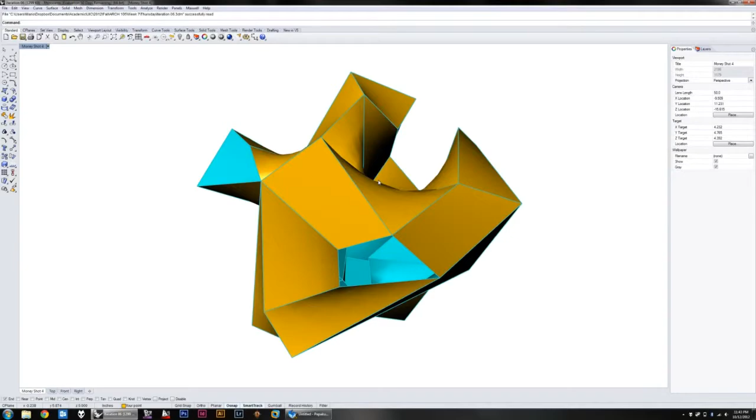Okay, so go ahead and open your model that you're going to be using. If I can find mine—yeah, whatever. Okay, so open it up. Notice that it's nice and pretty and done, and it's got whatever changes you need to make.

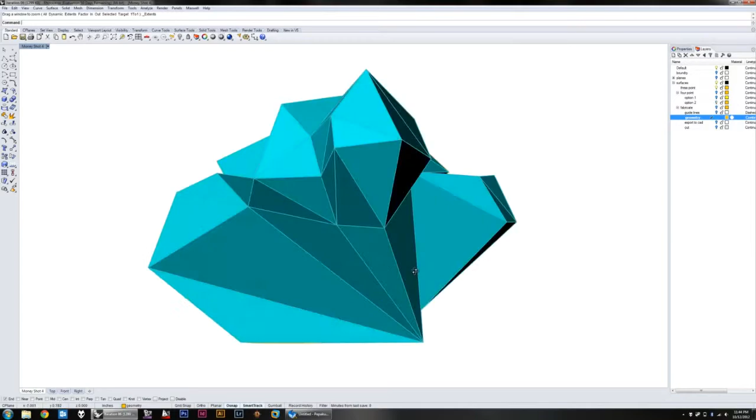Obviously this is the four-sided surface one. Go ahead—yeah, this is the 4-point. Go ahead and pick out your triangulated model. Mine is right here. I'm going to flip mine just so the faces are where they need to be.

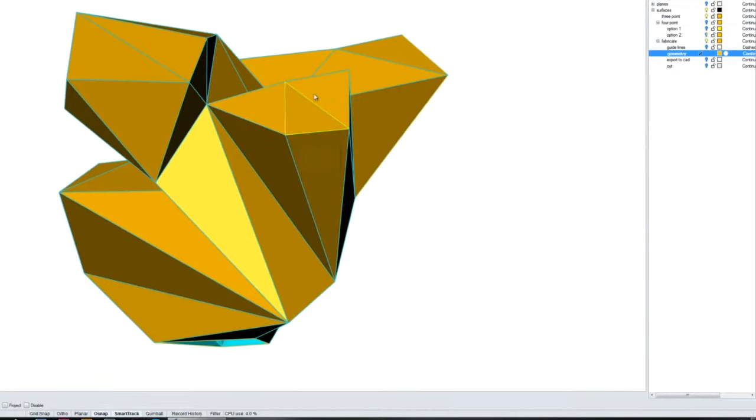So this is what I want to produce, essentially. You've got to make sure that if the surfaces are not joined, make sure that they are joined. You can't have something like this, right? All these things need to be together as a whole polysurface.

So just select everything, type in J or 'join' and enter—join, enter, right? Select the polysurfaces. If I don't screw it up. Alright, so these are all joined now.

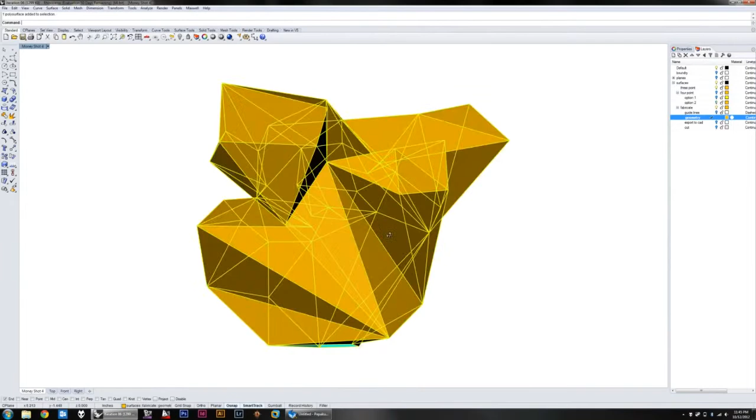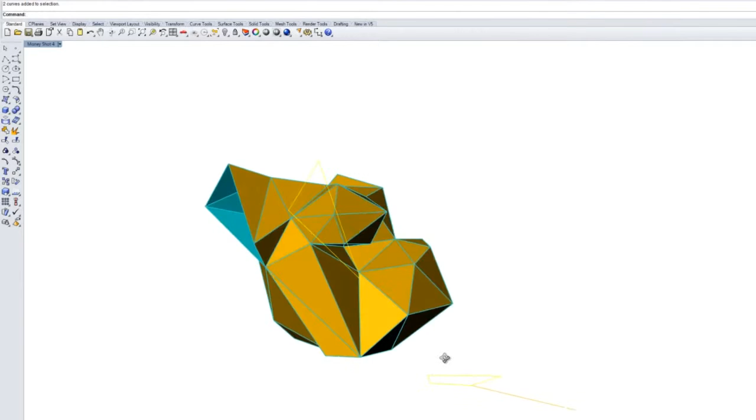A good way to test this is to just move this geometry ever so slightly, and you'll see that I have weird lines here. So I'm going to go ahead and delete any sort of extant data that will not be required to produce your study model. So that's good, that's good, that's all deleted.

This is nice and clean, so I'm going to hit File, Export Selected. I'm going to choose wherever—this one's just my desktop, right? Tutorial, sounds good. And then make sure to, under Save As type, just choose 3ds.

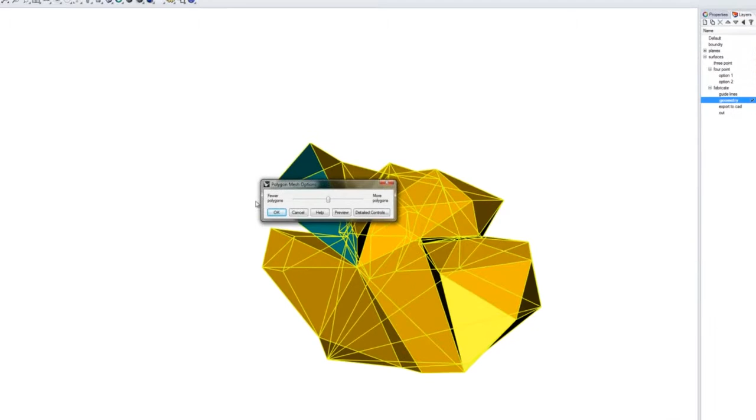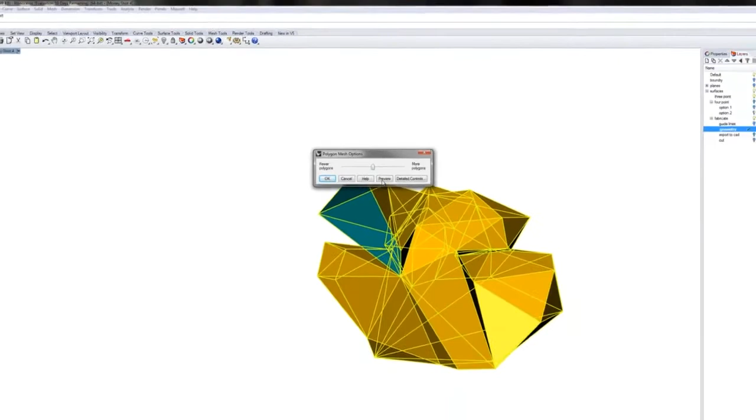Hit Save, and this option should pop up. Basically what it's doing is meshing this data, which means it's simplifying it and creating triangles from it—exactly what we did with our 4-point surfaces, except the program is doing it automatically for this geometry. That sounds nice and convenient, but it's not, because as you'll see, this is a preview of how it's going to mesh, and you get all these weird lines and geometries and planar surfaces.

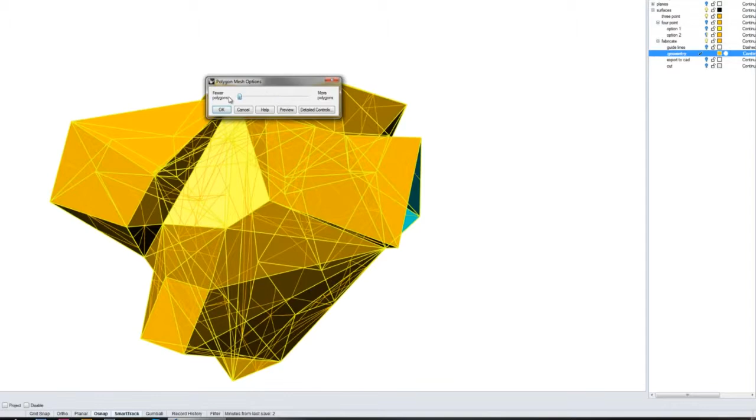We don't want any of that, because it's real nasty when it unfolds, and this Pepakura program creates tabs for it—it's just nasty. So what you want to do is slide the slider all the way down to fewer polygons. Hit preview one more time, and now you'll notice that geometry is a lot cleaner, or at least a lot more simple. Once that's done, hit OK.

Then you can close this. You no longer need it. I'm going to save it. So this is the 3ds file that we have, right, or that we exported out.

So in Pepakura, go ahead and hit this Open File button. Go to wherever it is that you saved it. I saved it on my desktop. Click this tutorial, or click whatever file. Hit Open. Click OK. You'll notice that this is black face right here.

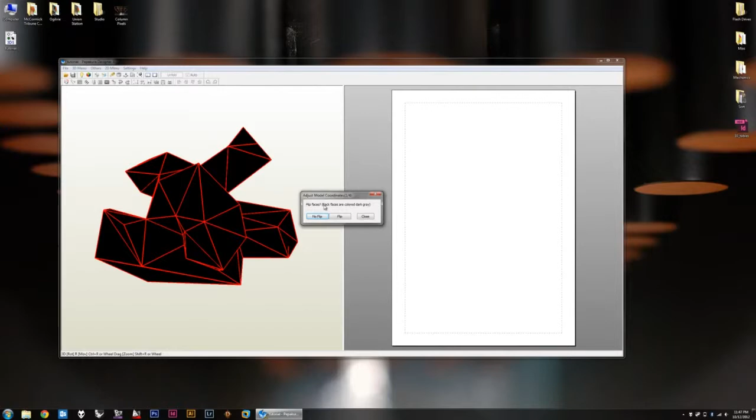Basically, it's telling you that the back faces are colored dark gray, right? So this should be okay because it's in what's called textured view. I'll go over that in a little bit. So hit no flip, then hit finish, right? Then hit OK. So this is your 3D model, okay?

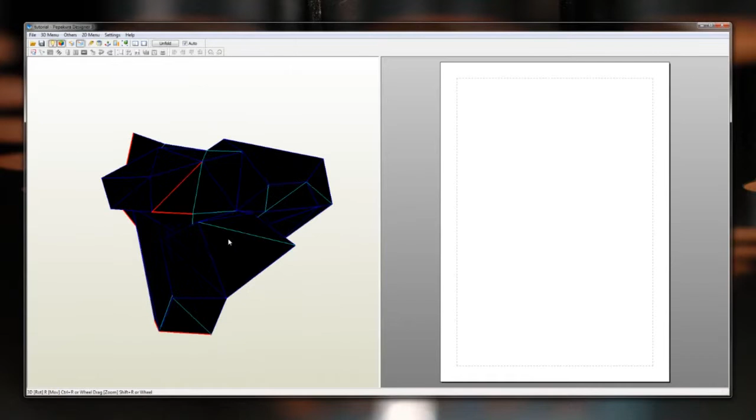So to eliminate this, all you have to do is unclick this button, and you'll see that the darker faces are the inside, lighter faces are the outside, right? These red edges are the naked edges, and this blue is essentially where it's going to unroll to create. So we just got to make sure that all the geometry is fine. Yes, this looks like my model.

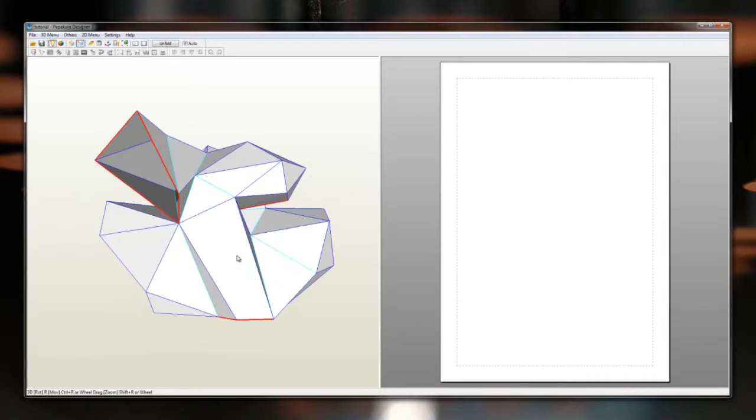All right, so go up here and hit the unfold button, and you'll see that it automatically unfolded this thing on a 2D surface, right? So it automatically created these tabs, and it automatically created fold or score lines.

Now these fold or score lines, there's two different variants. One being the dash dot, the other one being just straight up dash. Dash dot is the ones folding in, so creating valleys, and the dashes are the ones folding out, so they create mountains.

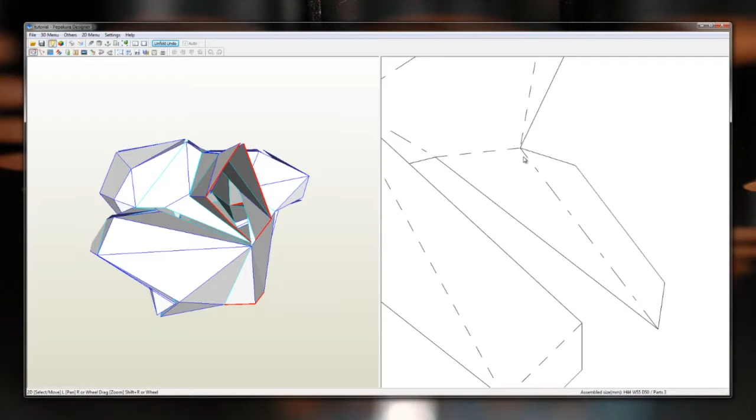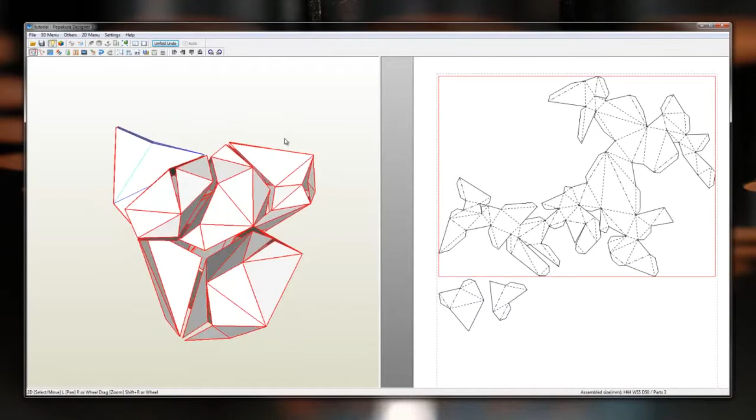So this is kind of, it's a little weird, it's a little crazy. If you click on each object, it actually highlights the geometry that it's creating, right? So this little guy creates this over here. This little guy creates this. This big Gigantor guy creates this big Gigantor geometry right here, right?

So the first thing that you're going to want to do is figure out, like, which surfaces or edges go to which tabs. So what you want to do is go into the 2D menu and hit the Show Edge ID button, and you'll see that it actually adds these IDs, or identification marks.

So this 8 tab, which is right here, goes to this 8 side, right? Let me find another example. So 2 goes to 2, 4 goes to 4, right? All this stuff. Nice and pretty.

It's not 100% clean sometimes when it creates these tabs, but keep in mind that this geometry, they are tabs, so they'll work. Like when you cut this out on your mat, you're basically going to be cutting here, here, then here, and here, right? This will create the geometry. This will create the tab.

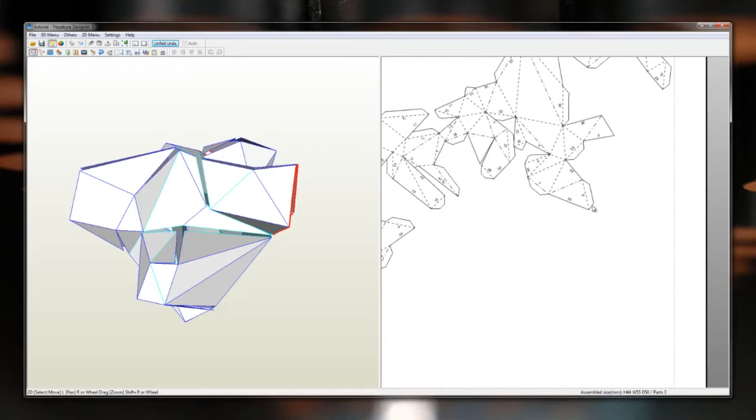You're never going to see this, so it's fine that this little bit of portion is just completely cut off, because you're going to put glue on here, and it's going to glue to side 27, which is off somewhere, I don't know, anywhere around here. So just keep that in mind when you're cutting these out using your X-Acto, that it's going to look weird, but it'll unroll just fine.

And in fact, I've already done 3 of these using this method, and it unrolls. It essentially starts unrolling itself, and it starts making itself while you're unrolling it. So it's just a whole lot easier to go through this stuff, right?

So another thing that you want to keep in mind is you've got to know the basic height of your model in millimeters, right? So I forgot the conversion, let me see. Right, so for every 1 inch, it's 25.4 millimeters, right? So if this is like 4 inches tall, it's roughly 100 millimeters, right?

Because in order to get scale correctly, let's say this is 4 inches, like from here to here, that's 4 inches, and that's what I want to get out of my model. And we'll do scale next. So go to 2D menu and hit change scale.

Then scale factor, and it's going to ask you for the height. That's all we're concerned with, just the height. So I know that my model is 4 inches tall, so that's going to translate to roughly 100 millimeters. So hit OK, and you'll see that it automatically scaled this by the factor that I've set it to.

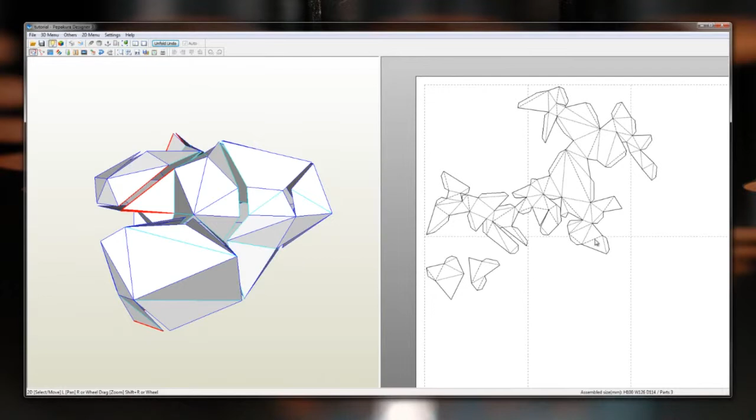You'll also notice that it expanded the amount of sheets of paper that are available. I think this is 8.5 by 11, so we're going to have to change the paper size, obviously. So next up is changing that paper size.

So we go to File, Print and Paper Settings. Actually, that was an A4. This entire program is in metric, so A4, A3, A2, and A1 are actually metric measurements for paper sizes, like European measurements. So this looks like it's going to be roughly an A2.

So just set the paper size to A2. Make sure that 'print lines clearly, vector print' is checked off, as opposed to print lines smoothly—you want them clearly. And then line weights, I set them at around 8. I think that's a good overall size, because that's the line weight of what's showing right here, so they'll read a whole lot better when you print them all out.

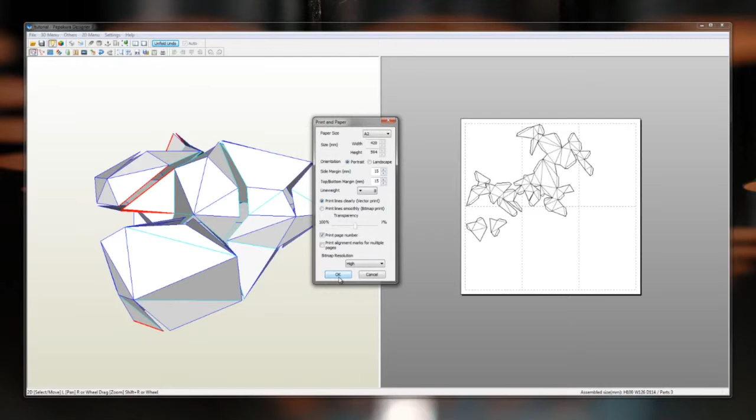So then hit OK, and you'll see that was a pretty good guesstimation of how large this thing is going to be. Now you'll also notice that there are margins. It's good to stay within the boundaries of these margins, so my unfold obviously does not.

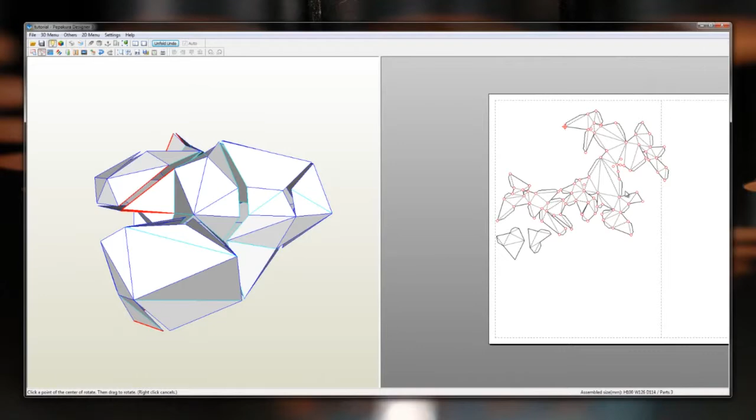So a way to rotate is, all you need to do is right click, hit rotate, and then just click on it and start moving. I'm going to move this way. So then again, it's clicking on one of the vertices and then clicking somewhere else and then start rotating it, and then positioning these guys such that they lie within the paper size itself. So that's fairly convenient for me.

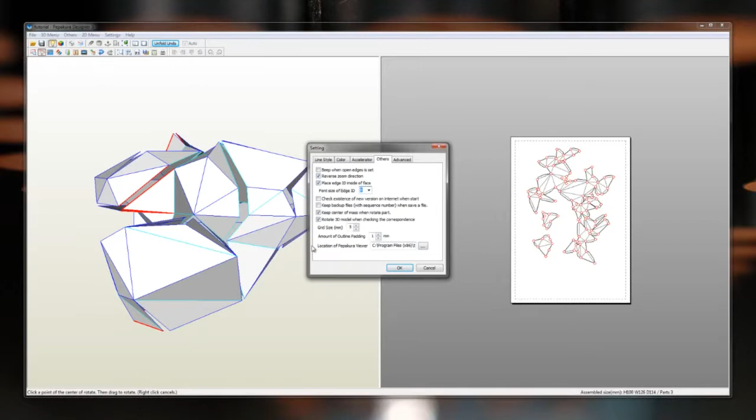Oh, here's another thing: zooming in and out is inverted, so let's go ahead and change that. Go to Settings, Other Settings, Others, and then reverse zoom direction. And while we're here, go ahead and place Edge ID inside of Face, and then choose the font size and set that to 8. That should be it. Yes, and then hit OK.

So what we just did, the font size changes the font of the tab sizes—the tab font sizes right here. So this just got bigger is all, which will help us when we're reading these cutouts and trying to put it all together.

Okay, so that is all done. We can right click, hit select and move. Now, say this is going to be a big guy to cut out and work with. It's going to be really frustrating—or not frustrating, but slightly more difficult to work with it. So I want to split this guy up into 3 pieces, because it seems like it inherently wants to be 3 pieces.

So an easy way to do that is you simply right click, join and disjoin face. Now you'll start seeing, if you highlight over an edge, it basically tells you where that edge meets up with—this is a really good tool when you're starting to put it back together. So 2 meets with 2, 38 meets with 38, 15 with 15. You guys know numbers.

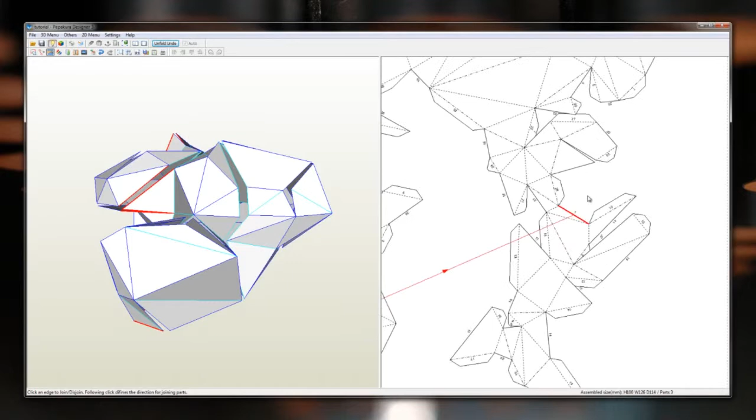Okay, so I'm going to say I want to split it here. So it splits that, creates a tab for it. And I'm going to split it here—it splits that and creates a tab for it. Done, that's it, that's where I want to split it.

You can split it further, or in a more meaningful way to what you're doing. Like, I could go further and do that, right? So it's just how you're going to want to fabricate this. It's easier to work with medium-sized chunks than it is to work with larger-sized chunks, but I wouldn't go so far as to create these tiny, tiny chunks for me to put together.

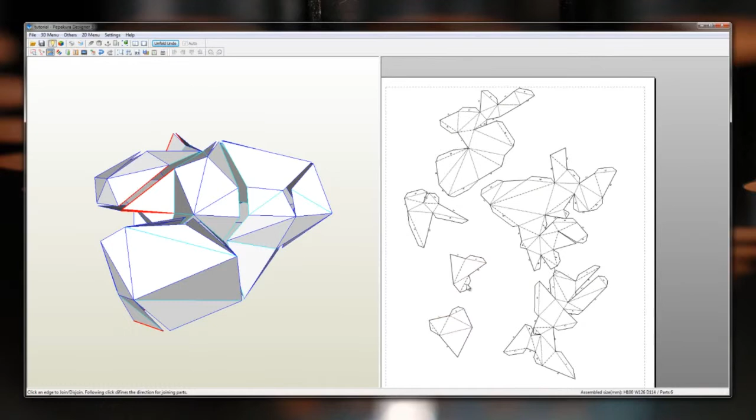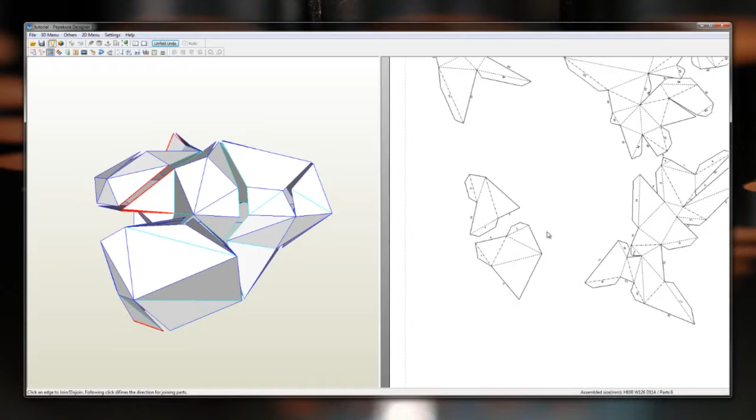And in fact, I think this is kind of too small for me to work with, so I'm going to click on here, and it's going to try to find a way to match these up in a meaningful way. But it does weird stuff like this, so I'm just going to disjoin it and leave it there, because there's no easy way to put that there. So the software did its best to put that in a meaningful way, so I'm just going to leave it.

I'm just going to look around my model, see everything's fine. This is kind of odd, but screw it. Oh, no, that's fine, I guess. You know what, in fact, let me, nah, I'll just leave it. All right, whatever, it is what it is.

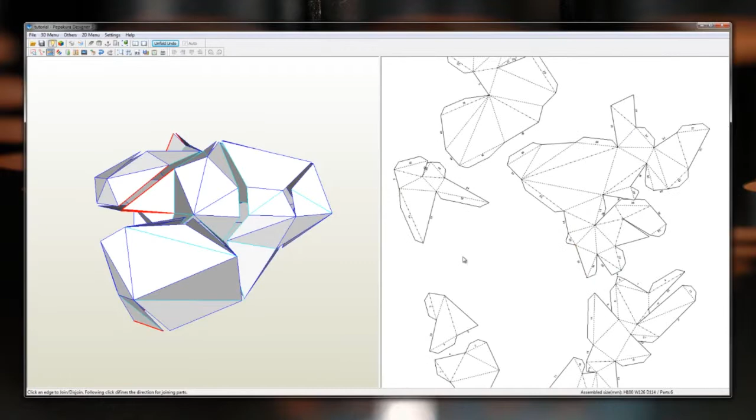Since I'm saying my model is 4 inches in height, this is now a 1-to-1 model, right? So if this was in your 3D model, say an 8-inch height, this would be a 1-to-2 size model. Keep that in mind. Scale is always a big important factor when creating these models, obviously.

Okay, so we are done with that. All we need to do is create a PDF. I'm just going to move these guys down a little to be slightly more proportional. So all we're concerned with at this point in time is to create a PDF, right?

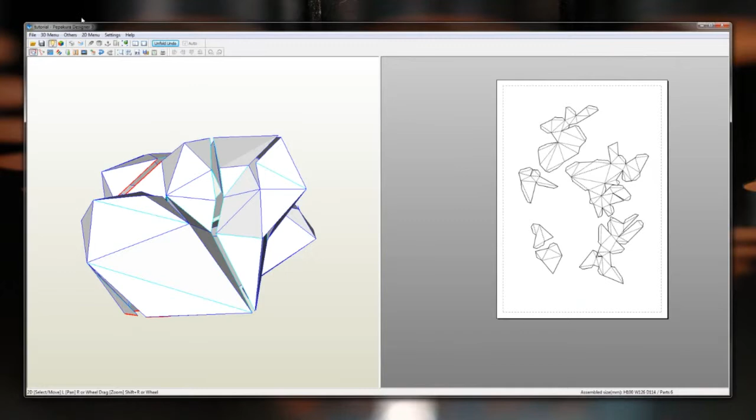Go to File, Printer Setup, and then just make sure to change this to Adobe PDF, and then change the size to the size that we set it here. Remember, we set it to A2, or whatever it is that you've set it to. So right now, in this example, it's A2. Then hit OK. That's it.

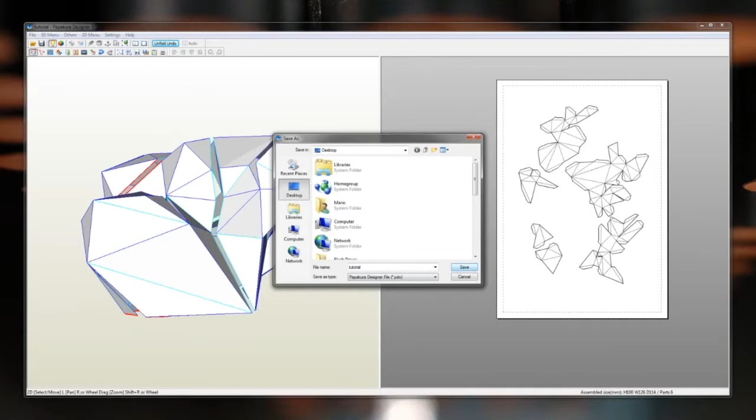Then what I would do is I would save this file. It's going to save as a .pdo file. Save it to the same location that your 3ds file is at, which should be the same location that your Rhino file is at, or the original Rhino file. Hit save, and you'll notice that you have this guy right here. So you can go back. All the work that you've done is now saved.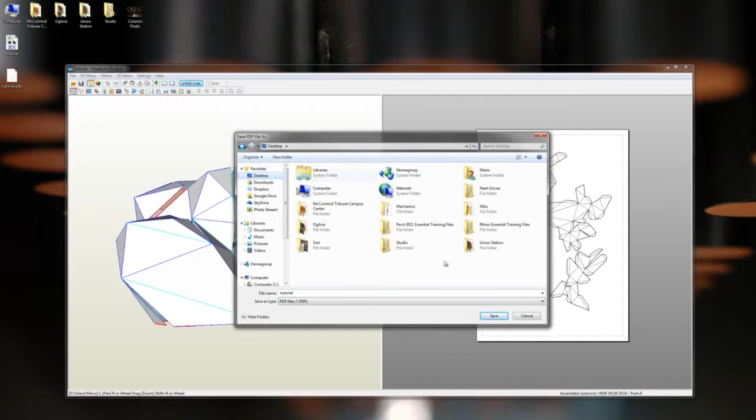So hit File, Print, go ahead and choose Adobe PDF, hit OK. The dialog box should pop up. Go ahead and save it to the original spot or any spot that you want to. It'll create that PDF, and this is it, right?

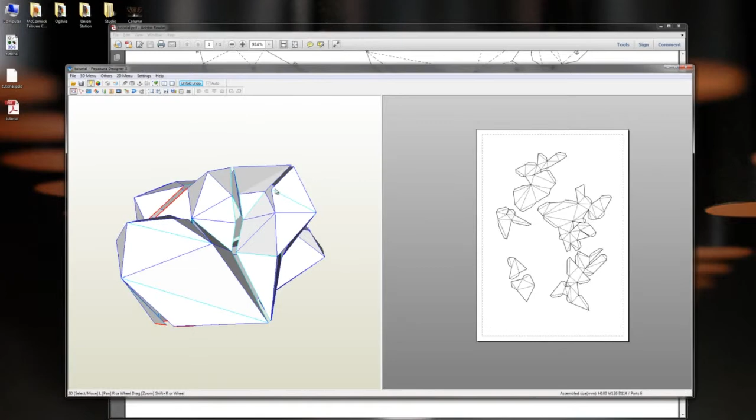So all you've got to do is take this to the plotter upstairs and plot it out. It's at A2, so it's rather small. This would technically be a half size for my actual model, because my actual model is 8 inches in height.

Quick things to remember to recap everything: the solid lines are cuts, dashed lines are hidden lines, I should say. They are mountains, so they fold in or they fold out. And the dash dots, those are valleys, so they fold in, okay?

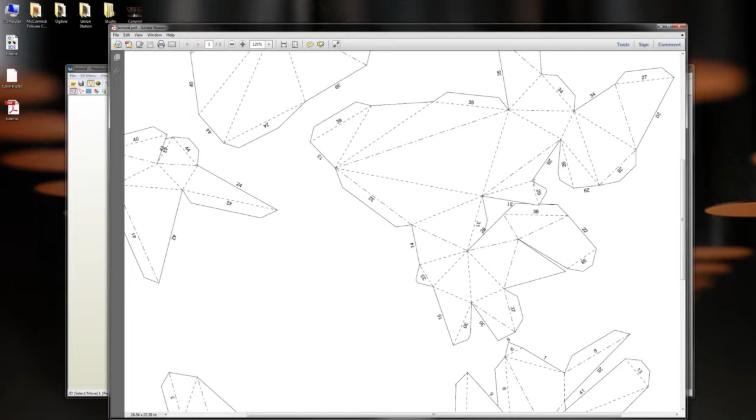So I find this a whole lot easier when constructing my stuff, just because I don't have to remember what folds in, what folds out. The line work tells me itself, and I actually like the way the line work reads once the model's done.

Hopefully this should accelerate your model making towards the point where you can start creating more and more study models for more and more iterations, and it alleviates your concern that, oh crap, I need to make another model and that's going to take me 4 hours. When I did it, and when Joe and Izzy did the same method, it took them like maybe 30-45 minutes per model, and that was because it was our first time doing it. I do not doubt that we can start getting this down to maybe 15 to 30 minutes per model, which is insanely quick, so that you can start seeing the changes reflected in something physical that you can hold, and seeing how that impacts your overall design.